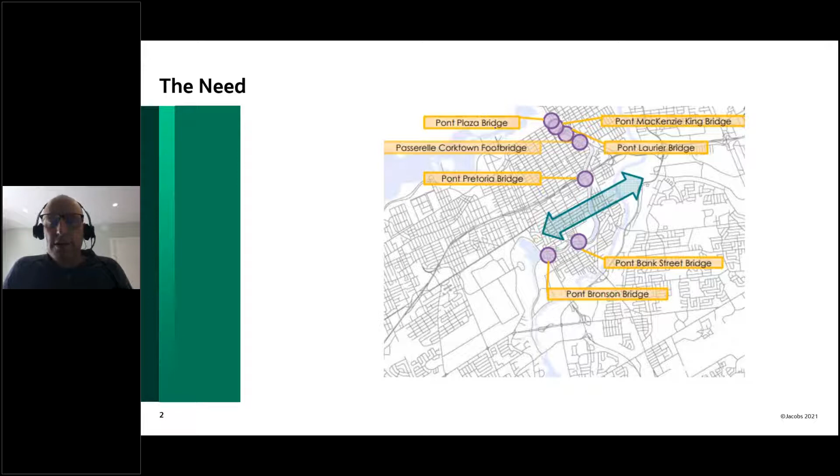So we started in 2010, actually, when the city first put out the statement of work for an environmental assessment to address the need, identified as this section between Pretoria Bridge and Bank Street Bridge being the longest linear barrier to east-west active transportation travel in urban Ottawa. You can see the purple circles here are all of the other bridges across the canal. The canal is obviously a fantastic resource, but it does create some challenges and serves as a barrier for movement. This was what the city looked to address through this planning process.

This was really interesting—the need for this wasn't new. It actually shows up first in the 1915 Holt Plan for Ottawa, with a new crossing at 5th and Clegg, and it showed up again in the Gréber Plan in 1950.

Up until 1950, the NCC used to operate a ferry service at this location across the canal. You can see here on the left, they actually commissioned a wooden footbridge across the ice in winter that operated in the 50s and 60s. So it took more than a century to make this happen, but it's always been part of the plan, and it was really nice to see it finally come to life.

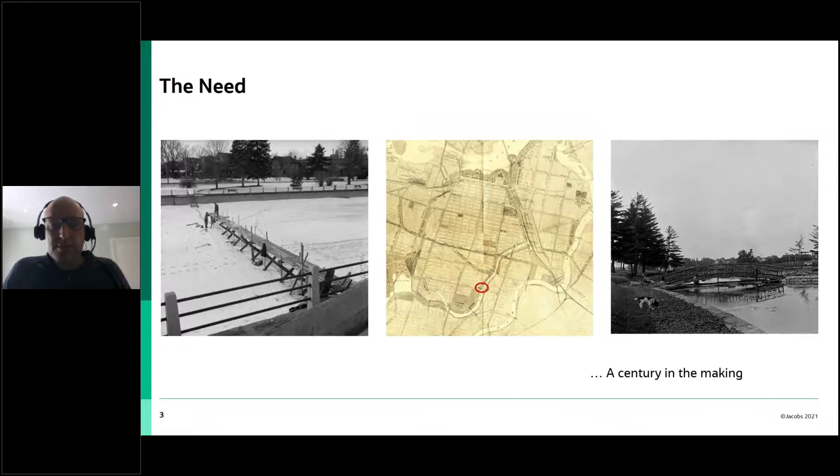In terms of the potential, this was some of the work we did to identify potential usage of the bridge. We looked at the OD survey, travel trip patterns, and mode share.

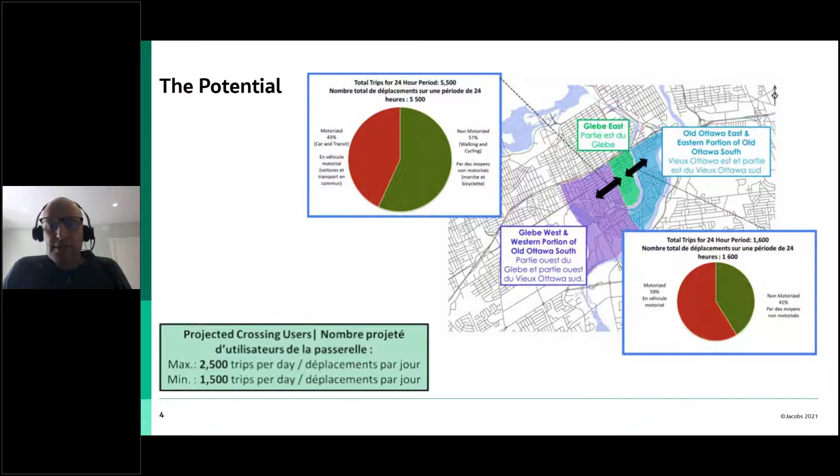What we found was that there was a significant reduction in active trips between neighborhoods across the canal, and this is obvious for obvious reasons. But we speculated, or projected, that if we could fix this link and start to see mode shares similar to other neighborhoods that don't have this east-west travel barrier, we could estimate about 1,500 to 2,500 trips a day across a new active transportation link in this location.

This is my only slide on process, and I won't spend a lot of time. I dove back into the archives, so you can see the picture from our first visioning workshop. I can see Michel Vachon, who's since retired but was the lead bridge engineer. Peter Stacey, I don't see in this picture—or maybe he's sitting next to Michel.

The process was a municipal Schedule C Class EA, because the lands adjacent to the canal are owned and managed by the NCC, so we had to go through their federal land use and design approvals process. And because the canal walls and the canal itself are under the jurisdiction of Parks Canada, we also had to comply with and work through their process and the management plan for the UNESCO World Heritage Site.

There was extensive public engagement. This graphic shows the process up to the end of our recommended plan. You'll see when I get to the end of this presentation that this was not the end of the story, and Mark will pick it up there and take it through to what you see out there today.

We assessed the project need and identified what some of the potential benefits would be. We worked with the community and technical stakeholders to develop a vision for the crossing, which I think was really unique in this project.

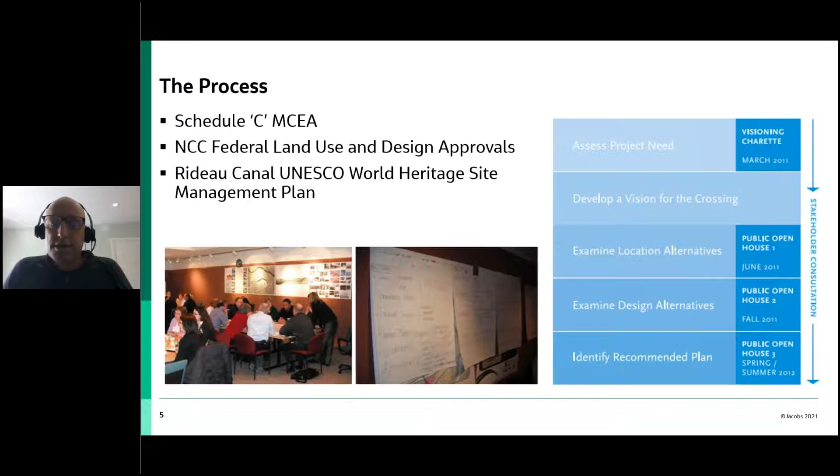That's what this photo is from, but this wasn't just bringing together all the various agencies and city departments—we invited and brought the community to those meetings as well, and it really helped build support and develop a framework and vision for the crossing that guided us throughout the process. We had to look at location alternatives, design alternatives, and ultimately a recommended plan.

In terms of the crossing type, we looked at what made the most sense in this context. We did look at going under the canal, but for safety, security reasons, and long-term maintenance issues, we quickly discarded that option. We also looked at movable mid-level bridges to minimize ramping requirements, but again, for long-term maintenance issues, this wasn't preferable. So we landed pretty quickly on the need for a high-level fixed bridge.

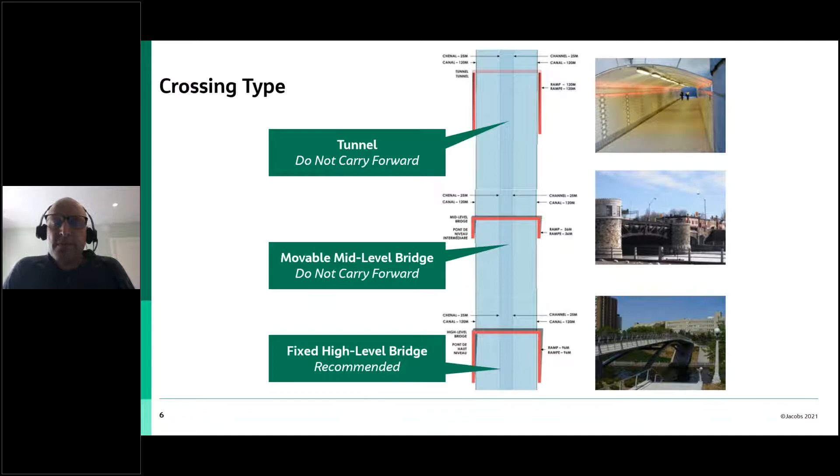This graphic in the center shows the implications on those ramps in order to accommodate the crossing—I'll show you the next slide because it's more telling. At first glance, you'd think crossing at the narrowest point of the canal would be preferable. However, because canal operations require a rather significant navigational envelope, it doesn't actually benefit you to cross the narrowest part—you end up with significantly longer ramps on land adjacent to the canal.

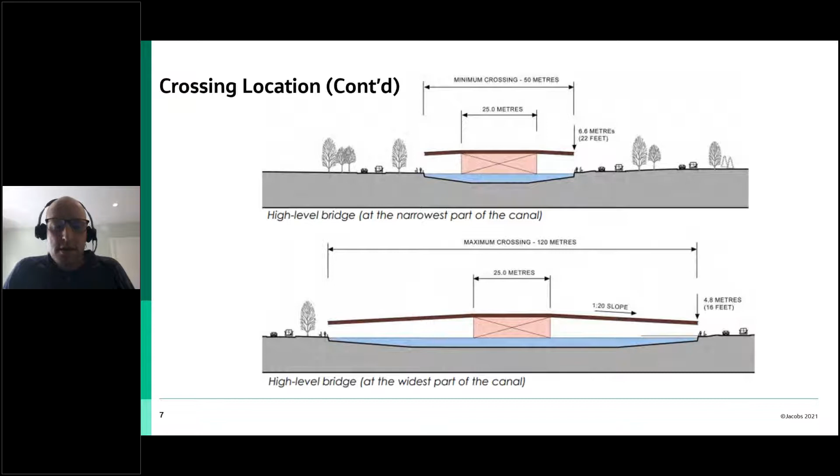The location at the bottom is actually at 5th and Clegg, and you can see where the widest point of the canal was actually beneficial—using the width of the canal to make the required grade and avoid some, though not all, of the ramping requirements. So ultimately, we recommended a high-level fixed bridge at the widest part of the canal.

We looked at various location alternatives. The key considerations were the availability of landing space and the topography primarily, as well as the network. You can see where we wound up at 5th and Clegg.

It's one of the only logical crossing locations for cyclist traffic, and it also is the widest part of the canal. It has available landing space to work with. Certainly to the north, that was not the case—the canal was very narrow and we would have had long ramps.

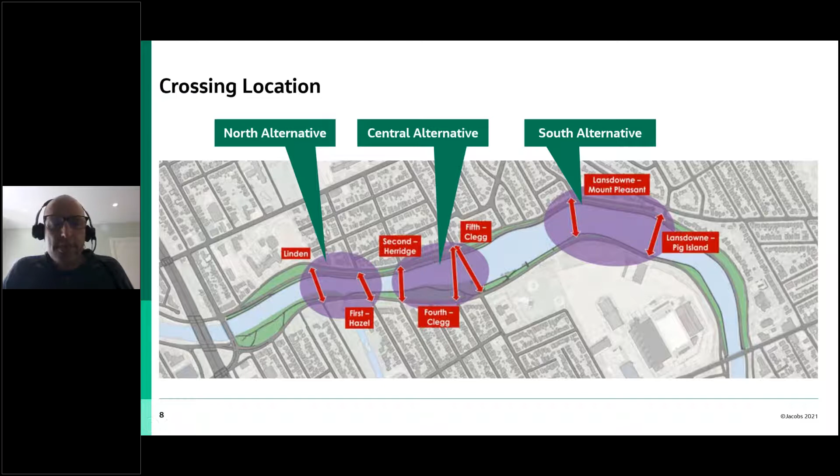And the closer you go south to Lansdowne, the grade change is significant and you'd actually end up flying over the canal entirely and not connecting to the pathways below. So through a variety of considerations, the logical choice was 5th and Clegg.

So some of the design principles—I'll quickly run through these. What's impressive to me, after finally seeing the bridge finished, is how closely we were able to achieve a lot of our design principles, and that's a credit to Michel and the structural team, and Mark and the architectural team.

We had to maintain our navigational envelope. You'll see a lot of reference to this idea of being compact, transparent, quiet, gentle—being as slender and light in the landscape as possible. This was seen as a real desire in this location, in this setting, to not make an enormous statement.

This is an understated part of the canal, a quiet residential section, and there was a strong desire that this should fit seamlessly into that landscape. I think when you're out there today, most would agree we've managed to achieve that—minimizing long ramps over the water and running parallel to the canal banks, using the width of the canal to our advantage.

We had to maintain the continuity of the canal walls. The canal walls are actually designated by UNESCO as a World Heritage Site, so we were not able to play with them at all—the canal walls had to be maintained.

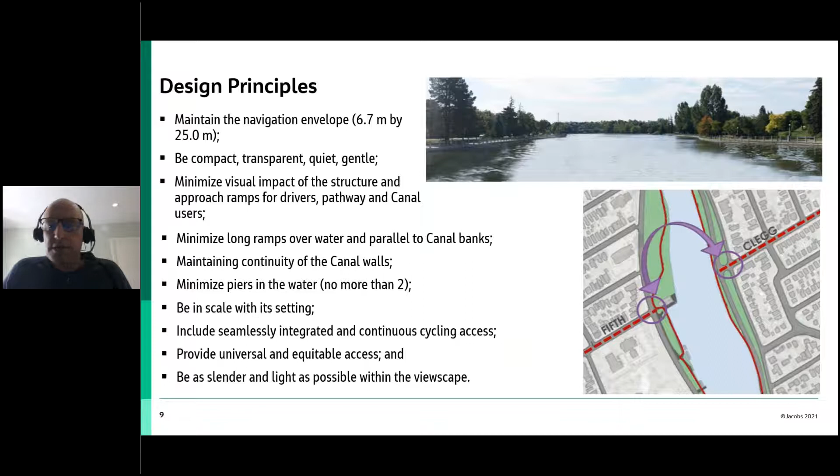We needed to minimize piers in the water, integrate as seamlessly as possible with the pedestrian and cycling networks, and obviously provide universal access. So those were some of the design principles we set out to achieve.

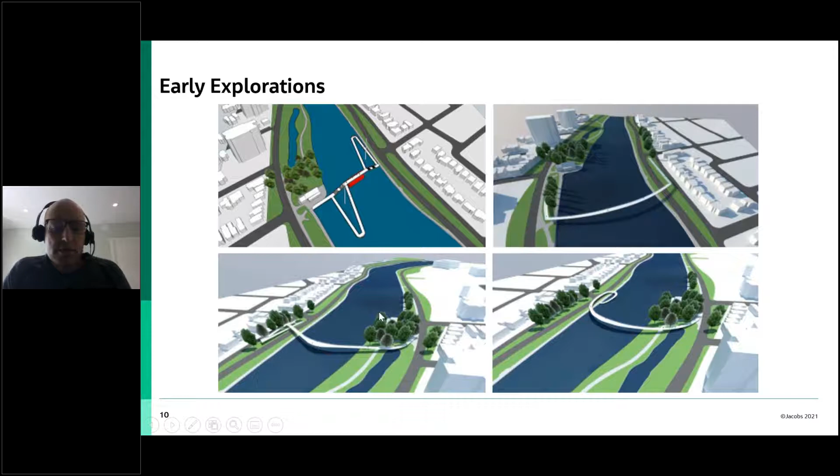This last iteration looked at whether you could avoid the switchback ramp with some form of curling ramp structure adjacent to the canal walls. But ultimately, this configuration was viewed as having the most potential and the least impact.

There were significant concerns, surprisingly, though there was broad support for this project. We were a bit the victim of timing, in that the Lansdowne Park redevelopment project was at its height in terms of community concerns and opposition.

One of the major concerns we dealt with early on was parking—the perception that this new link was going to create a parking lot in Old Ottawa East and South, particularly during major events at Lansdowne Park. So we had to do quite a lot of work to prove that was not likely to be the case.

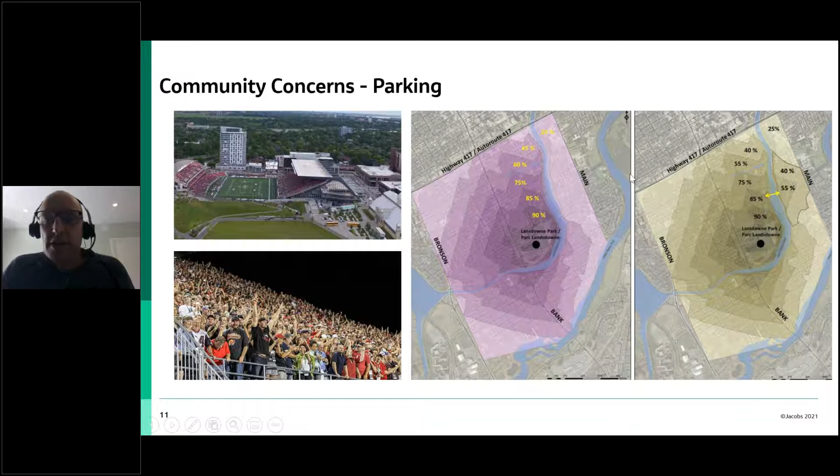These showed some of the walking times and the impact on parking availability. What we found was there would be a slight increase in parking saturation at the bridge head, but beyond that, there are better places to park and walk.

We selected that location. One of the primary reasons is because the median was so vegetated that there were not these broad open views during the summertime anyway. So it was probably the least impactful location, but there's no doubt there is an impact, and the city and Mark and his team worked quite diligently to try to address it.

I know that iterations of the ramp structure design did look to minimize the visual intrusion, and the landscape design was set up with a similar goal in mind.

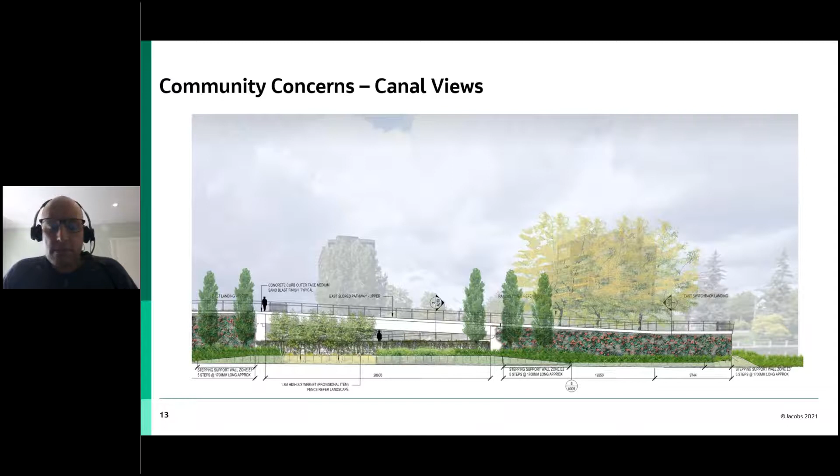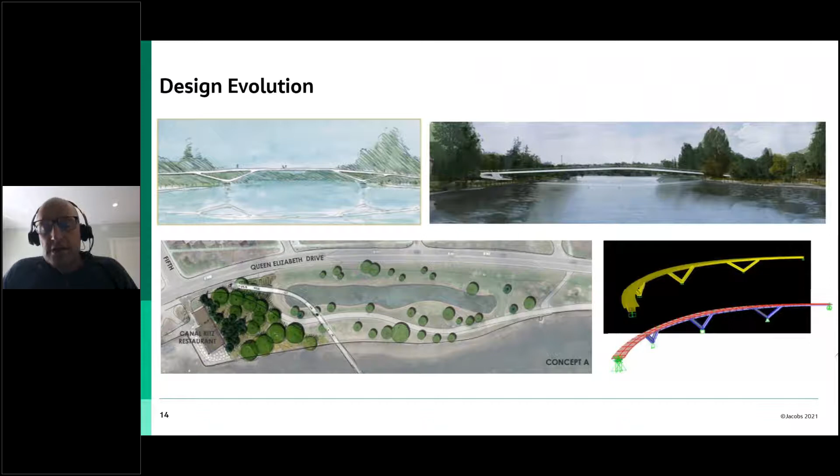There was a lot of work done by the bridge architects and designers to turn this vision into a reality, which at the end of the planning process—and these are my last few slides—these were kind of the enduring images of the bridge from that planning process.

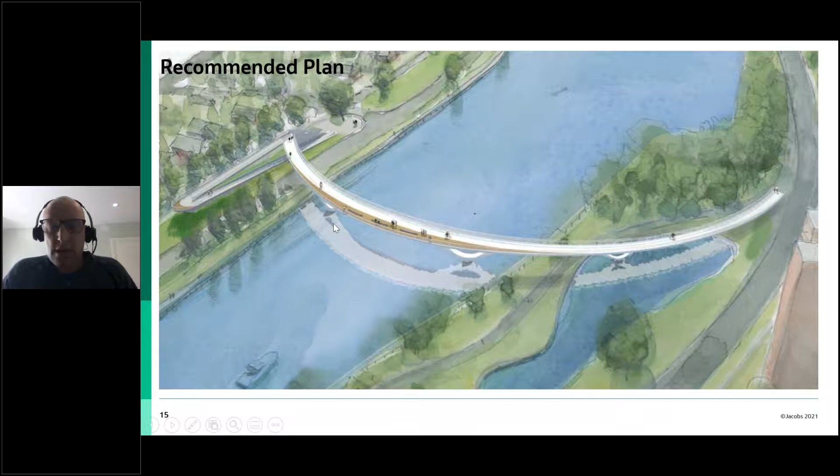The original concept did widen out at center span, to provide a bit of a place to hang out, and then landing down, spanning over Colonel By Drive and landing in the median—which is more or less what you do see today, and I think is fairly representative of what happened in the end.

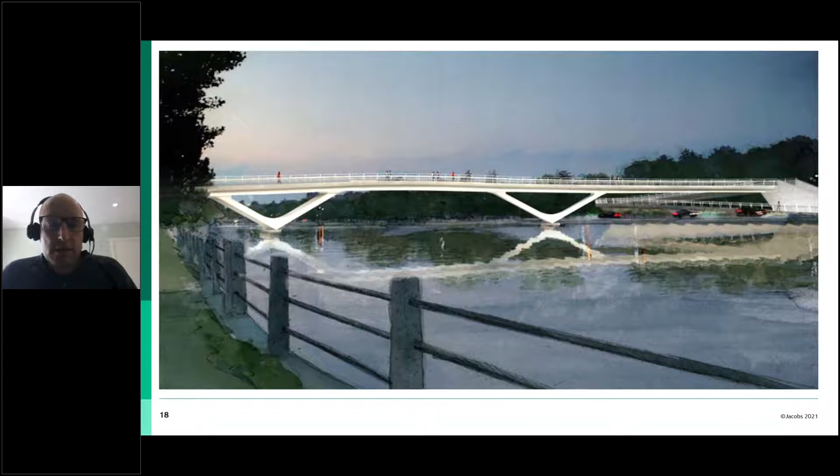Here's another one—if you were out there today, maybe not today, you might fall through the ice—but a couple of weeks ago, the view from the canal itself I think is very close to what you would experience if you were there today.

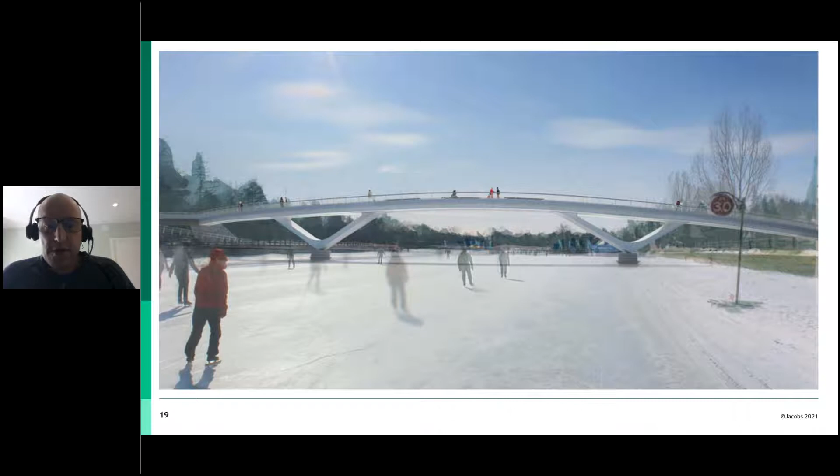And the last one—I got these numbers from the city, so thank you to Jessica and Megan for providing me with some numbers from the counters they had out there.

I talked earlier about how we had projected somewhere between 1,500 and 2,500 trips per day. The actual has been about 2,300, but obviously much higher than that in the summertime months, dipping down in the depths of winter. I still find it amazing that we're getting numbers between 500 and 1,000 trips per day in February across the structure.

So from my perspective, it was a huge success and a lot of fun to work on.

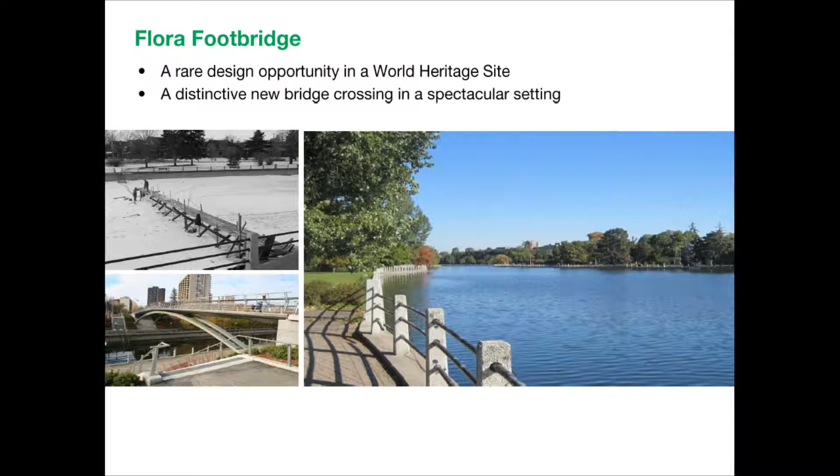A 125 meter span here at the wide part of the canal instead of the 46 meter span at Corktown. So this is where we ended up on the bridge design in late 2016.

After the curving bridge concept that Tim finished on, there was a 4-year gap. A couple of embarrassing city bridge projects, one out towards the airport on the Parkway, value engineering workshops, and the outcome of all of this was the city instructing a straighter, simpler bridge.

Because we wanted to carry on doing the detailed design, that was the direction that was pursued. So on the west side, we kept open the idea of a curve. There's a 100-meter long pathway sloping up at 5% from 5th and the restaurant to a new lookout space.

Sorry, Tim. Sorry, Mark. I'm saying that nobody can see it. One second, I'm just going to... People are saying they could see Tim's screen, but they can't see Mark's screen. Sorry to interrupt you there. Okay, I can see Mark's screen. Yeah, I can see it fine too. Okay, I've got a couple of questions saying I can't see the screen yet. I just have a screen saying waiting to view Tim Dickinson's screen, which is not correct. Cannot see any images.

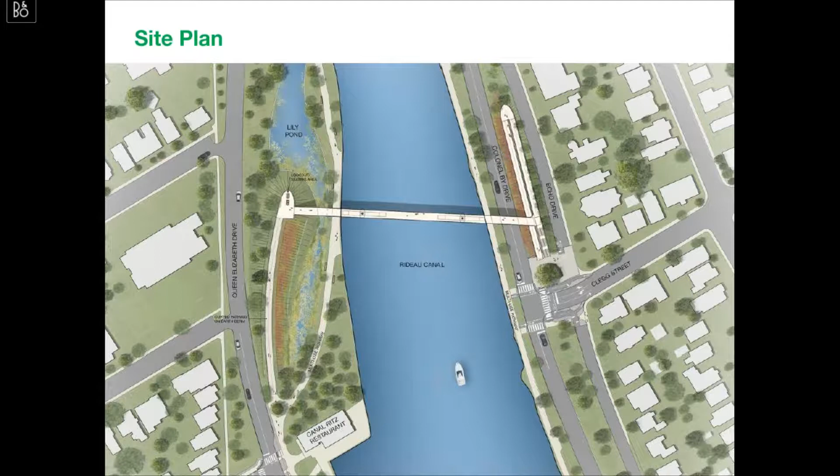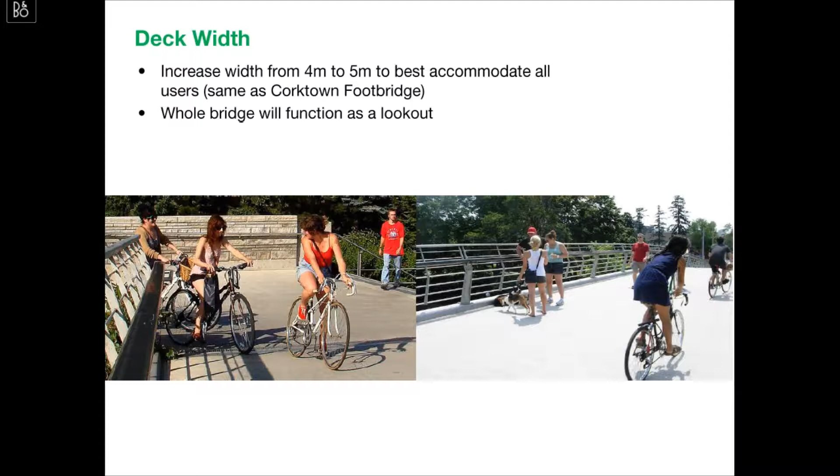It was decided to increase the width of the deck from 4 meters to 5 meters to best accommodate all the users. This is the same width as Corktown Footbridge, and it's consistent with the notion that the entire bridge will function as a lookout rather than having separate projecting lookouts. So the design allows the flexibility for people to stop and enjoy the view anywhere along the bridge.

The proposed cross section was 5 meters clear width. We originally suggested a 3-meter zone in the middle as a travel-through zone, and then a 1 meter zone either side as a slow zone. We proposed a special wearing surface on the deck, applied in different colors so that the central part might be in a typical multi-use pathway gray, with a warmer pedestrian kind of color each side.

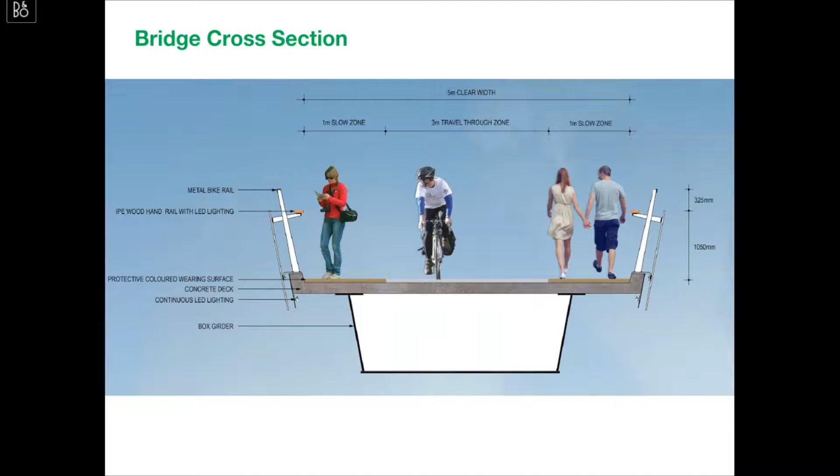We looked at some precedents about how to demarcate shared use space. The 2 images on the left from the US show a more traditional traffic engineer approach to demarcation, more about trying to separate different modes and lots of line painting, symbols and arrows.

The middle images show the Calatrava Bridge in Calgary. There's a central faster zone about 3 meters wide with no line markings, and slightly raised pedestrian zones each side. But at the end of the day, you can see from these photos, the bridge still needs to function as a shared use zone. People will go where they want to go. Everyone has to be ready to slow down and take care, especially cyclists.

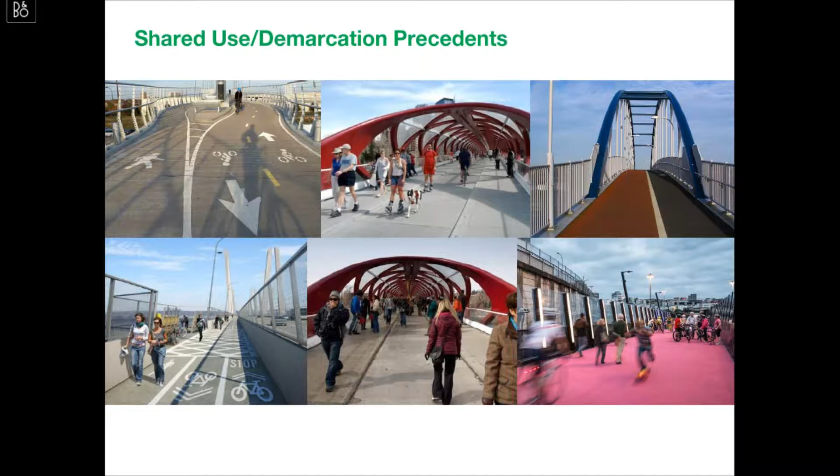And then on the right, these show a couple of approaches to integral colour. The top from the UK in a way that demarcates territory, and the bottom right from Auckland in New Zealand uses bold, distinctive colour to identify a special shared use zone with no line painting at all.

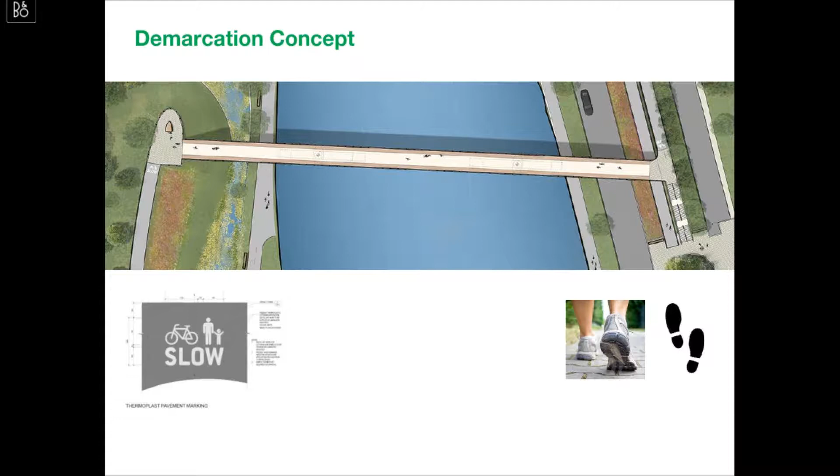On the bridge itself, the initial proposal was striped slow zones on each side in a brighter, distinctive colour, and a central zone in a more neutral colour. Transition zones at each end, and approach pathways in a standard multi-use pathway asphalt with thermoplast treatment, and the minimum amount of symbols and text that communicates the message: this is shared space, go slowly, take care. It ended up bilingual, but that was the only signage that ended up being used.

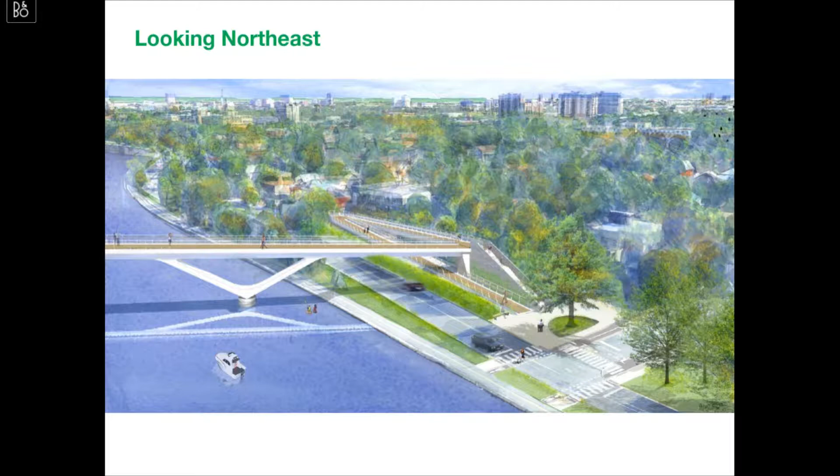One of the original renderings showing the east side landing with the switchback ramp and the stone-clad stair element leading to a new pedestrian plaza around the existing oak tree.

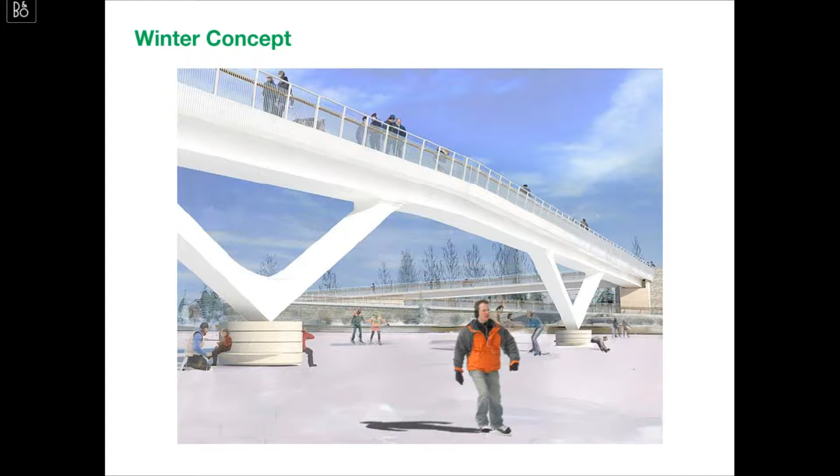A rendering showing the bridge during Winterlude. The elliptical bridge piers were actually built with a curving bench so that skaters could take a break and retie their skates. This was a wonderful concept, but unfortunately the piers have become the snow storage zone in winter, so they are not usable. But if you did shovel the snow away, they are there.

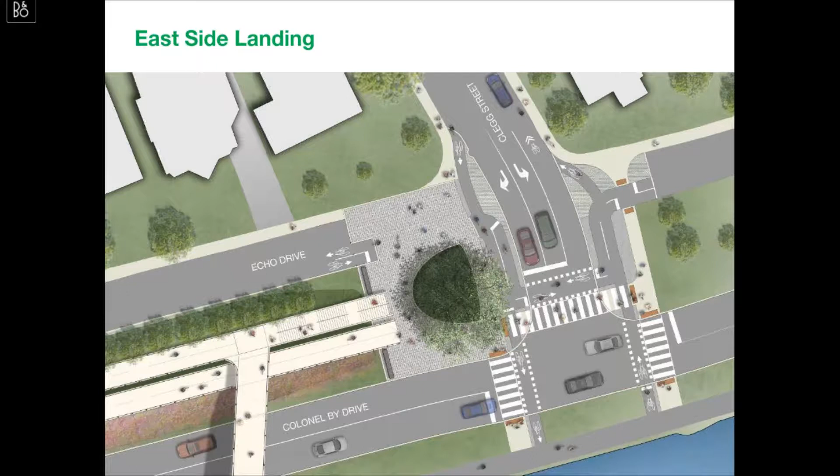On the west side, the landing's key challenge was the Crossroads, where the new bridge sloping pathway would meet the main multi-use pathway. The original concept was a roundabout, perhaps marked by a tree to encourage cyclists to slow down, especially coming off the bridge, and make a careful decision as to which direction to proceed.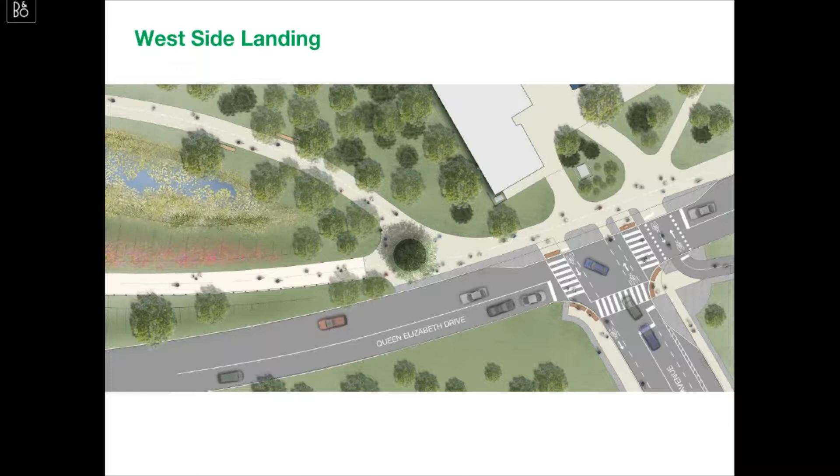And now to a series of photos of how it all turned out in reality. Starting at the East Side Plaza under the oak tree, the Grand Stair.

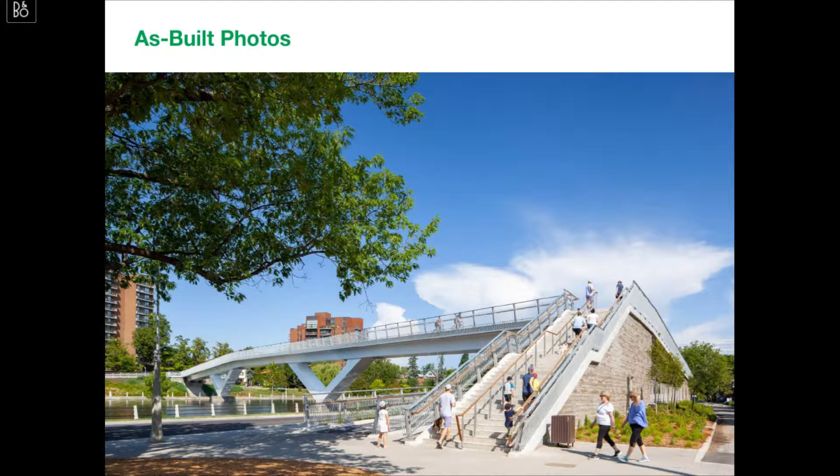Even though it's two quite long flights, because we had to get up to 6 meters high, the 12-inch tread and 6-inch riser combination make it comfortable to use, and it still saves about 140 meters. So lots of people choose the shortcut as shown here, especially when so many cyclists are taking the switchback ramp option.

The typical multi-use pathway asphalt and signage markings is visible on the lower leg of the ramp here. And then the surface changes at the landing to force cyclists to slow down and do a careful U-turn.

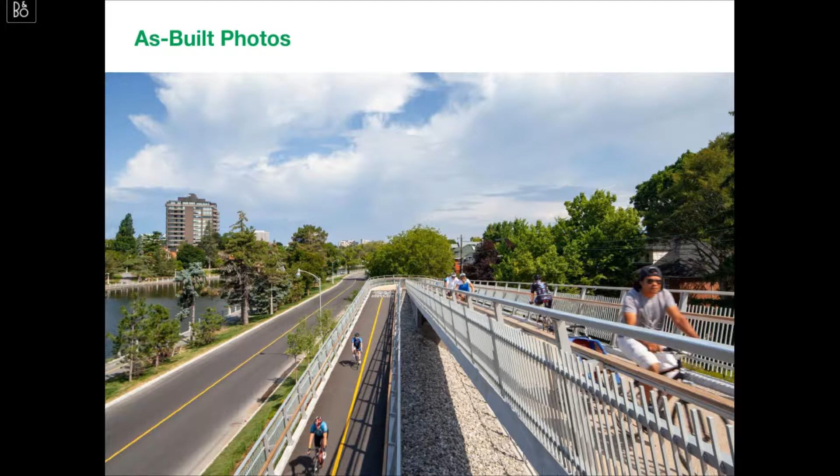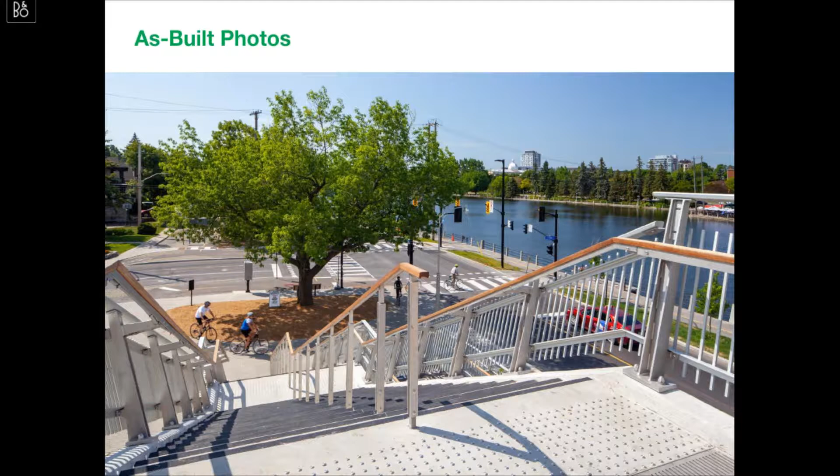The deck ended up with no markings, and in the end it was decided to proceed with this matte acryl epoxy surfacing with inlaid coloured aggregate to protect the concrete decking, and it also gives us a warm, distinctive colour.

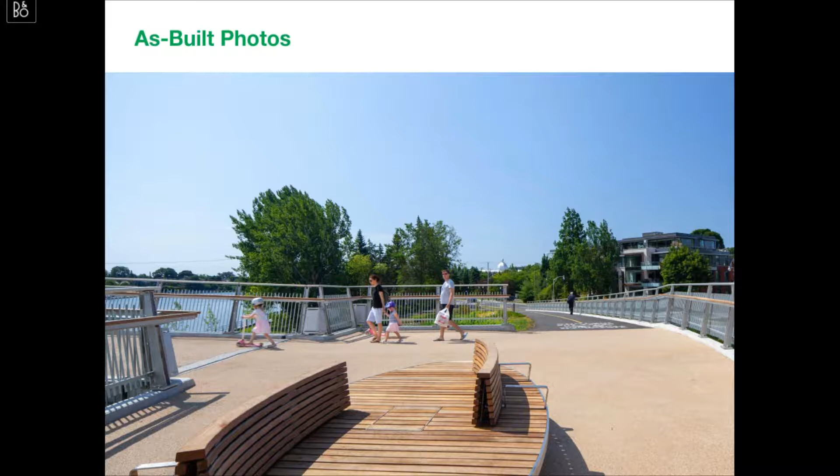This is how the west side roundabout concept turned out in reality: a more triangular low flower planter to maximize clear sight lines for everyone, and very thoughtful use of how to do the yellow striping to indicate the main pathway and the offshoot pathway.

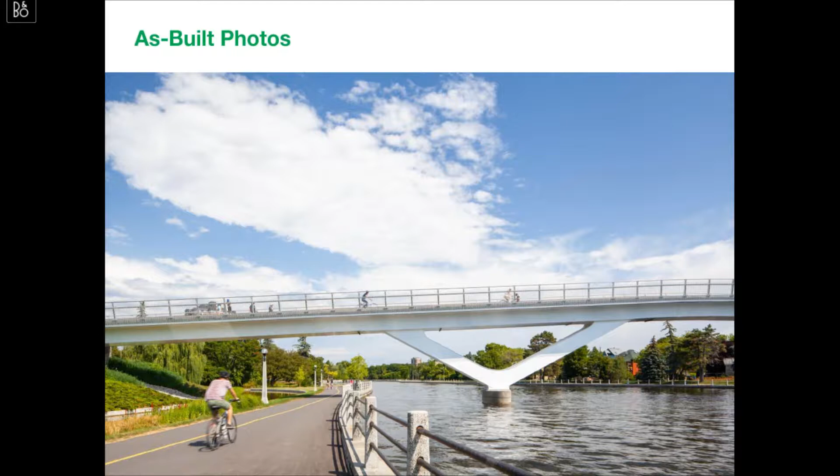The west side multi-use pathway takes you right under the bridge. And there's a good view here of the bridge V piers in summer. As Tim said, we tried to get the structure as light and transparent as we could visually. Just to note that the winter water level is 4 feet lower than the summer, and that's why you can't see those little projecting shelves on the concrete portion of the pier.

And the last shot here, back on the east side multi-use pathway, showcasing all of the transportation mode opportunities available along this part of the Rideau, including the water traffic. So we ask, who needs a car anyway? Thank you.